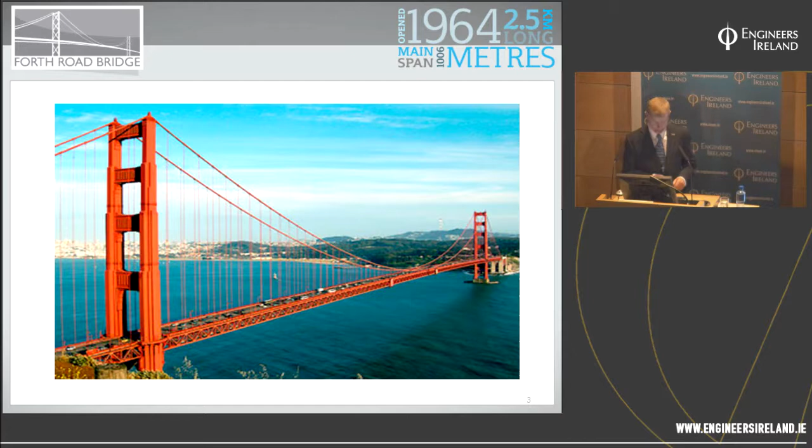This actually should be the most famous bridge in the world, but it isn't. It's the Akashi Kaikyo Bridge in Japan, with a main span of 1,991 metres - almost 2 kilometres between those two big towers. If you're ever lucky enough to get to Japan, it's really worth a visit. It's a monster - this slide doesn't do it justice. It's twice the length of Forth Road Bridge between the towers, and it's quite a sight.

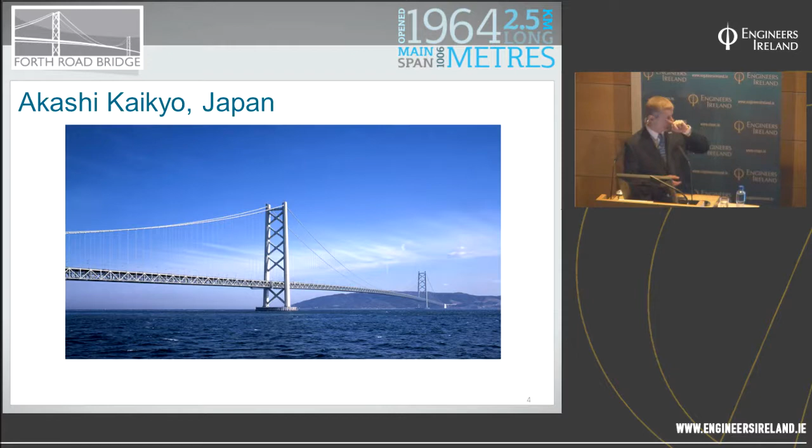Those are suspension bridges. Of course, cable-stayed bridges are being built as well throughout the world, and this is another development. There seems to be a trend that cable-stayed bridge spans are increasing too, and I'll show you a graph of that in a bit, but this is Stonecutters in Hong Kong, 1018 metres. We're now over 1,000 metres for cable-stayed spans, and 15 years ago that wouldn't have seemed possible.

There are lots of these being built in China. This is one across the Yangtze at Wuhan, about a 500 metre span. There are dozens of these built and opened in the past 10 to 15 years in China. The big question is, how well have they been built for maintenance? And the answer, I think honestly, is probably not very well. There may be an issue, like any developing economy, where the race is to get the infrastructure in place to get the capital flowing and develop the economy. Sometimes the thought of maintaining them afterwards is a secondary or even tertiary one, and a lot of issues, I think, are going to crop up over the next 10 to 15 years with these bridges.

Still building suspension bridges in China as well. This is one which has just recently been completed and will open in April of this year at Wuhan. This is quite a beast - it's a 3-tower twin-span suspension bridge, which is pretty unusual. The two towers at the ends are concrete, and the middle one is steel to allow it to flex when there's asymmetric loading in the spans.

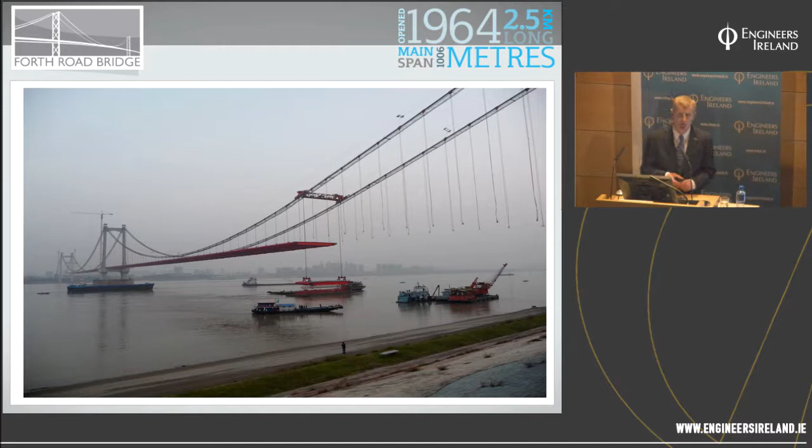There's a lot of discussion over cable-stayed bridges versus suspension bridges - what's the best form? Suspension bridges cost about £5,000 a square metre to build, while cable-stayed bridges will be about £3,000 a square metre. So there is a difference, and it's mainly on construction cost and construction time that this cost is realised or shown.

Here's a graph of developments and spans over the years. Here's Brooklyn back in 1880, and you can see what's happened. These are suspension bridges - this massive jump here with George Washington and Golden Gate, and then it flattens off again, and there's Akashi. The poor Danes built Storebelt in the same year, a 1,600 odd metre span, and got gazumped by this monster, so they didn't hold the title for very long at all. What will happen after that? Who knows - there's a proposed 3-kilometre span to Messina. It's been on the cards for a while, but hasn't developed.

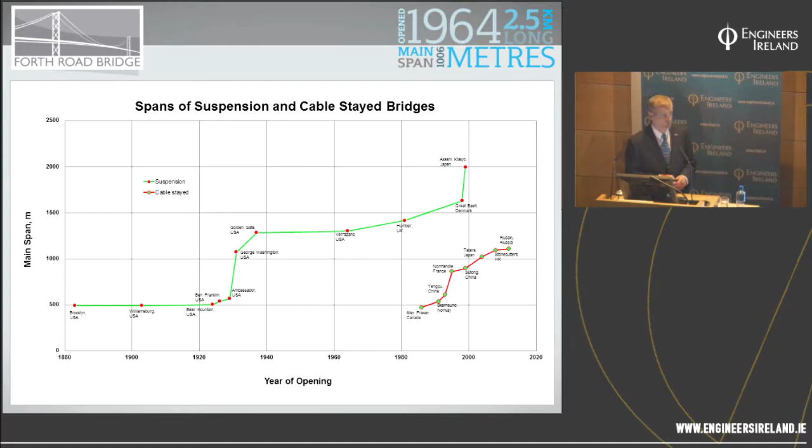If you look at the shape of this graph, it's shifted to the right because of time, and also down because of spans. This is cable-stayed bridges, and they're very similar in shape. This jump here to Pont de Normandie was huge - this was Michel Virlogeux's great leap in the dark, because they were pottering around about 500 metres, and he built one at 856 metres. Again it's jumped up, and we've had the Russky Bridge just opened in 2012-13, with a 1,104 metre span. So it's quite a jump there.

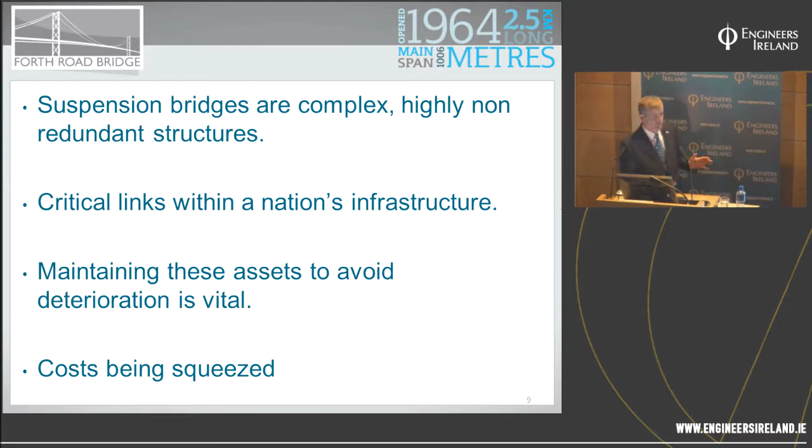Concentrating on suspension bridges, they are very complex, highly non-redundant structures, meaning that if one of the major elements fails, you've lost the bridge - there's not many places for load to go. They're usually critical links within a nation's infrastructure, so maintaining them is vital, especially as we're all facing costs being squeezed, so you've got to justify the maintenance costs in the future.

This is on a fairly lightly loaded day with the wind not doing very much. The bridge will actually deflect 4 meters when it has its full traffic loading on it, and it will move 7 meters laterally at its full design wind speed. We've got GNSS sensors on the bridge, and when we got hit by an 85 mile an hour gust the other month, the bridge moved 3.5 meters to the side.

So these are very flexible structures, and they're also highly non-redundant structures. They have to be looked after. A lot of money needs to be spent on them, because you don't want to end up with something like this.

This is Kartanegara in Indonesia. It failed a few years ago. Whether it was design, construction, inspection, or maintenance that caused the failure, we don't know, and I'm not sure we'll ever know. But lives are lost, and we can't afford for that to happen.

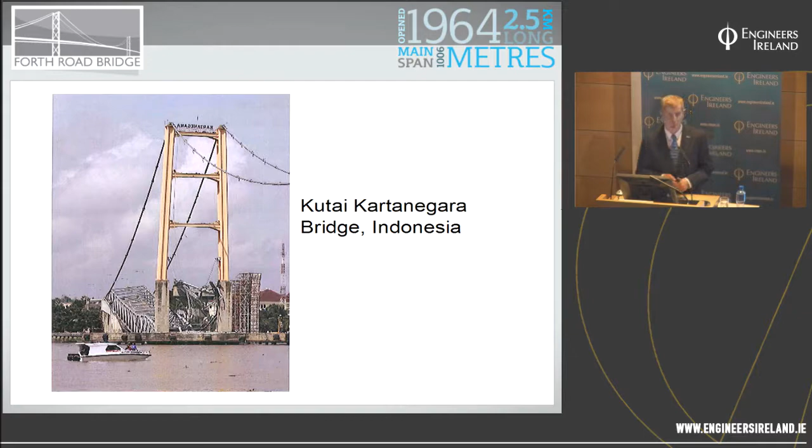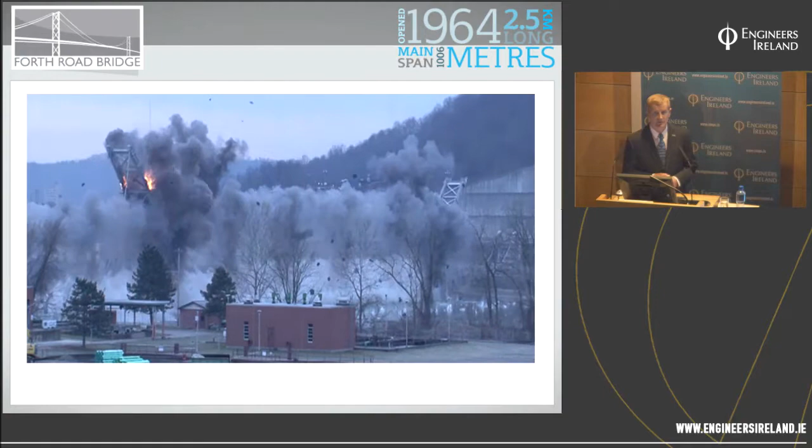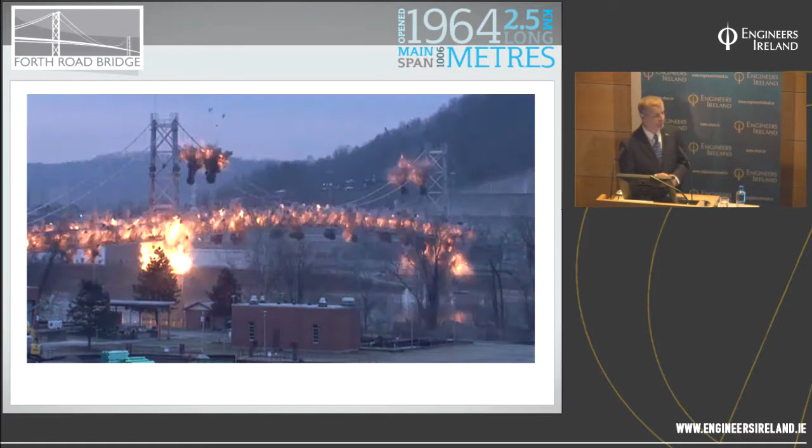But it's not only in so-called third world countries that we get problems with bridge maintenance. This is a bridge in the United States across the Ohio River, Fort Steuben, and it deteriorated to the point that it had to be demolished and a new one built. I think that's a terrible state for you to let your nation's bridge stock get into, that you have to do that.

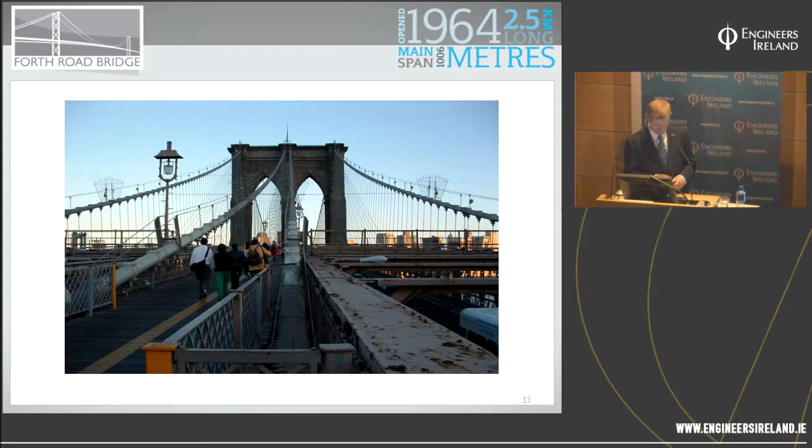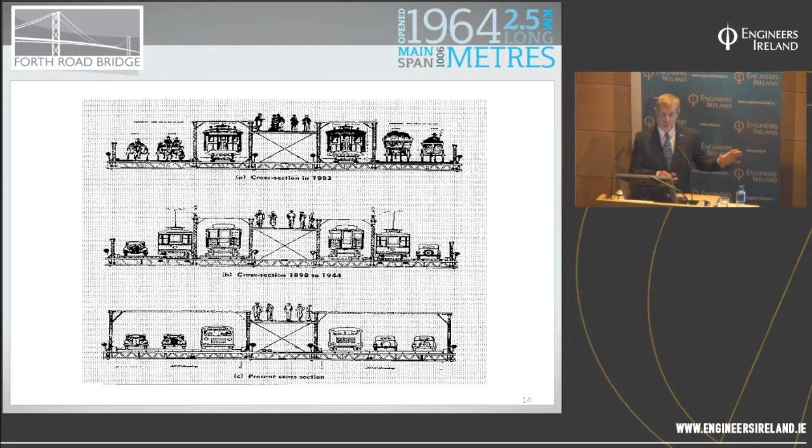Functionality changes over the years in these bridges as well, and we must be aware of that. The top section shows Brooklyn, opened in 1883, and Roebling would probably never have thought it would be taking motorised vehicles nowadays. By 1944, with some structural alteration, it's now carrying vehicular traffic only. The pedestrians are in the same place, but it's restricted to only light vehicles and cars.

Now the diversion route is huge - it's around by Kincardine, 22 miles there and 22 miles back. If we are unlucky enough to have an incident on the bridge, it's 2 lanes north, 2 lanes south, as we did when we had a diesel spill and a lane out for 6.5 to 7 hours. The queue length was 4 hours coming out of Edinburgh. There was no point in people going around by Kincardine, because it would have taken the same time.

That sort of thing becomes politically a problem, and we get a lot of pressure when that happens. So we are very restricted in what we can do - we can't close a lane or a carriageway during the day. Most of the work is carried out overnight, or if we have to resurface, it's specified and notified well in advance for carriageway closures on weekends when traffic's down about 10%, but we still get 2.5 to 3 hour queues when that happens.

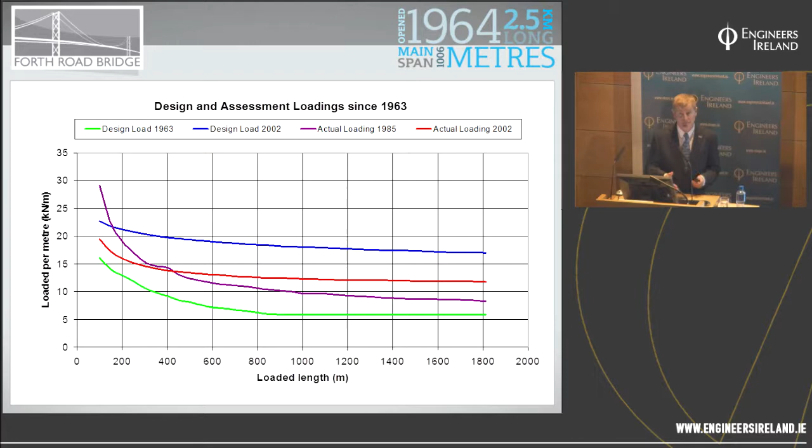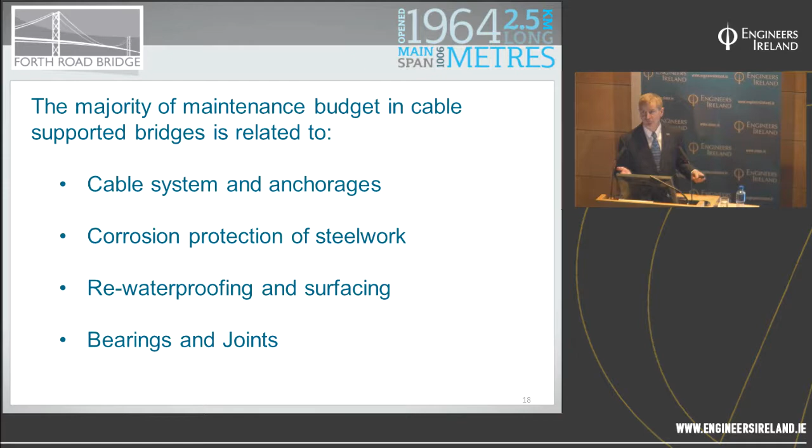With maintenance in these suspension bridges and any cable-supported bridge, the big ticket item is the cable system and anchorages, if you've got them. We've also got the three usual suspects that everyone has, no matter what the bridge is: corrosion of steelwork, waterproofing and surfacing, and our old favourites of bearings and joints - the ones we know and love.

For example, we had to build pier defences around the bottom of the piers because shipping has changed, and the overhang of the bows of modern-day vessels would now impact the steel tower legs, whereas before, when they designed it, that wasn't thought about because they wouldn't have needed to.

So a lot of money has been spent on the bridge over the years, and I'm going to concentrate on the cable issues we've had. But interestingly, the biggest amount of money we've spent has been on replacing the viaduct bearings.

The approach viaducts are very common - two simple box girders with a concrete deck on top. There's about 750 metres of viaducts in total: roughly 260-270 metres in the north and 450 in the south. And that's been the biggest ticket job in cost terms.

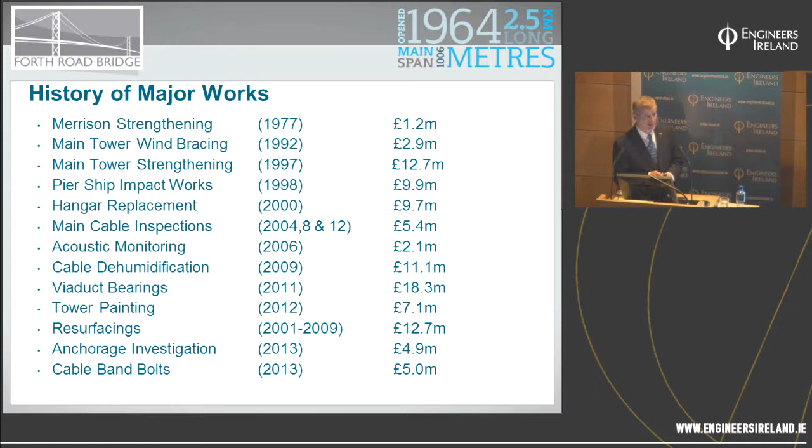We jacked the box girders up and replaced all the bearings, but we had issues with chlorides in the piers that were supporting it. But I will concentrate on the cable works we've carried out, because they've caused quite a lot of interest over the years.

But that's just an idea of the money spent - we've spent £259 million on capital projects since the bridge was opened. Now, the cost of building the bridge - these costs are as of the time of spend - was £11.5 million.

And that's not too unusual. The George Washington Bridge is just about to undergo a $1 billion refit, in addition to the money already spent on it to date. You've got to spend money on these assets because things change - risks change, loading changes - and things deteriorate as well, because they do move about quite a bit.

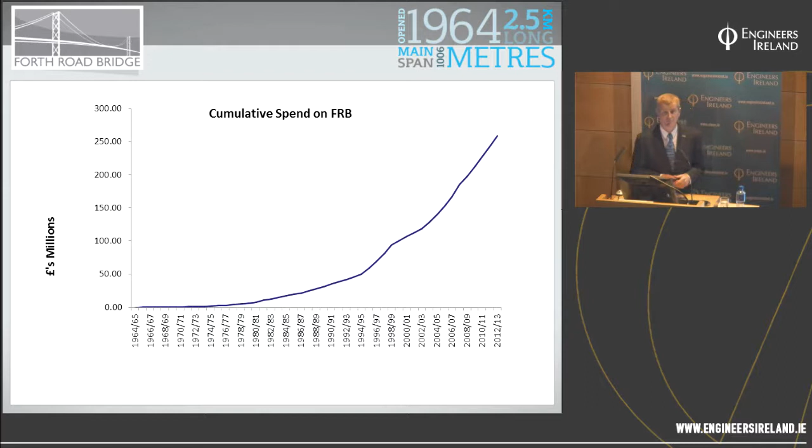I'll look at the cable in some detail. Cables and suspension bridges are fairly unique in that they're made up of individual wires, and this is how the Forth Road Bridge cable was formed, and that was how Roebling's formed Brooklyn, and Golden Gate was formed, and George Washington, and all the bridges up to that point.

These wires are high tensile galvanized wires that come in reels onto the site. I've seen other photographs of how they coax them into place, usually with pinch bars. If you're using a pinch bar on galvanized wire, you will damage the galvanizing. So, as in all cases, what happens on site sometimes has the greatest effect on how your component will act throughout its life.

There's been a new development: these are called strands, and there are 37 of them, and the cable is put into strands as it's spun. The Japanese have come up with a new development where they now form the strands in the factory, which takes away splicing and means you're constructing them in a factory setting. It means you have to transport them in huge drums, but it has assisted both in speed and in preventing damage to the wire when it's put in place.

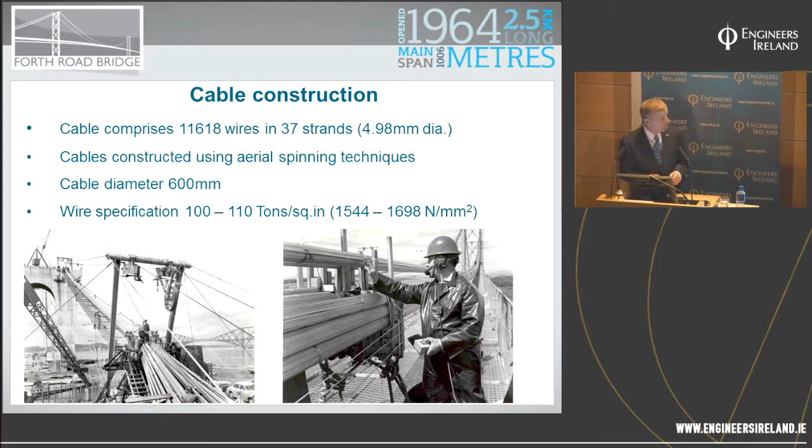You then compact them, traditionally with a compacting machine. As you can see, the guys are not posing at all in that photograph, which was taken sometime around 1962-63. After that, a galvanized wire is wrapped around the outside under a bit of tension by a wrapping machine, which you can see on the right hand side.

Before the wire is wrapped around, it's been traditional to put red lead paste on it - this was a Roebling's idea - and then wrap the galvanized wrapping wire around it. We tend to use zinc paste now because red lead is, of course, banned from use. That method of construction has been used since Brooklyn.

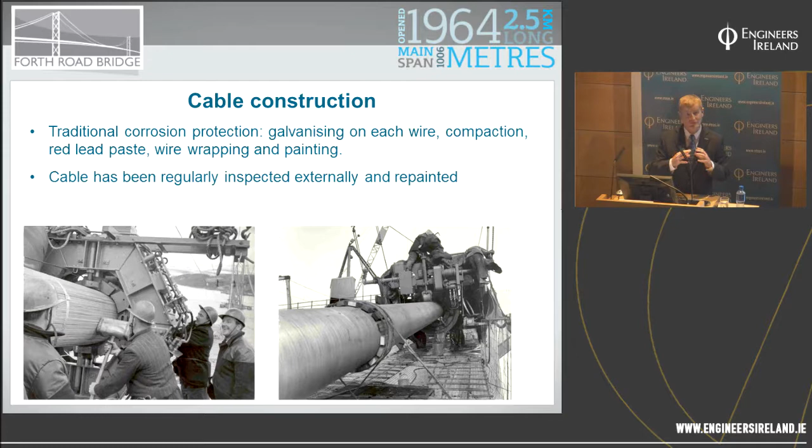You can compact the cable as much as you like, but you'll never take all the voids out of it, because you've got circular wires touching each other. On average, compaction will take you down to about 20% voids. So even though it looks like a very dense cable, 20% of it is still void, is air. That's what it looks like in section: galvanized wire, wrapping wire, red lead paste or zinc paste, wrapping wire, and coating.

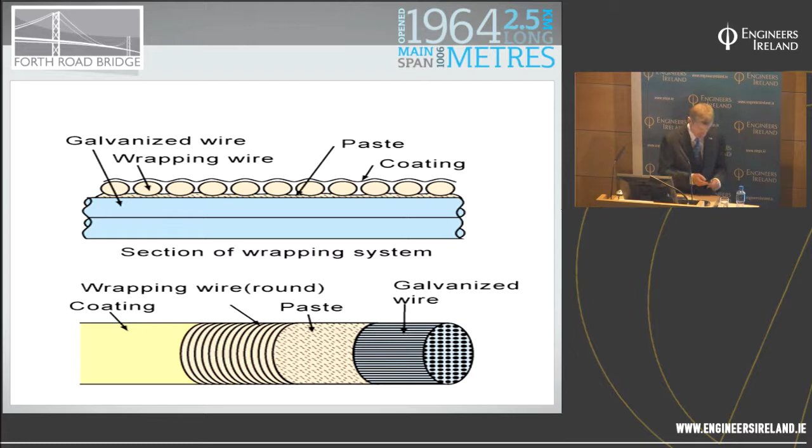You take the wrapping wire off and drive wedges into it to open it, and they were finding really serious problems in some of the bridges. Because of that, the National Academy set up a working group to produce guidelines to inspect these cables, because nothing was available at the time, and to evaluate their strength. Once you've inspected them, what do you do once you find conditions like that? How do you evaluate the strength or strength loss?

We decided in 2004, having gone across to see these things, to have a look inside the cable at Forth. Even though we didn't have water running out of our cable, which they did in some of the bridges - it was dry, looked great on the outside, had been well maintained and well painted - we asked ourselves the question: this is the most important element of the whole bridge. When we carry out a principal inspection, how can we say that we've had a close visual inspection of the wires within the cable? And the answer is we couldn't.

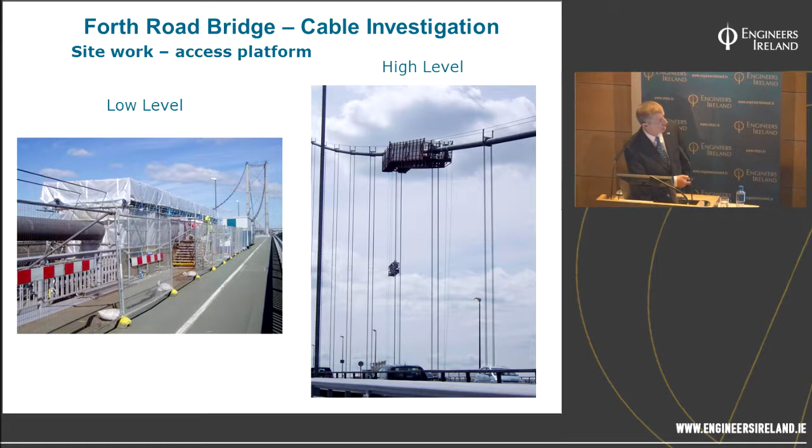When you do that, the Americans were doing it all the way around. We were a bit more cautious and decided we'd do one sector at a time.

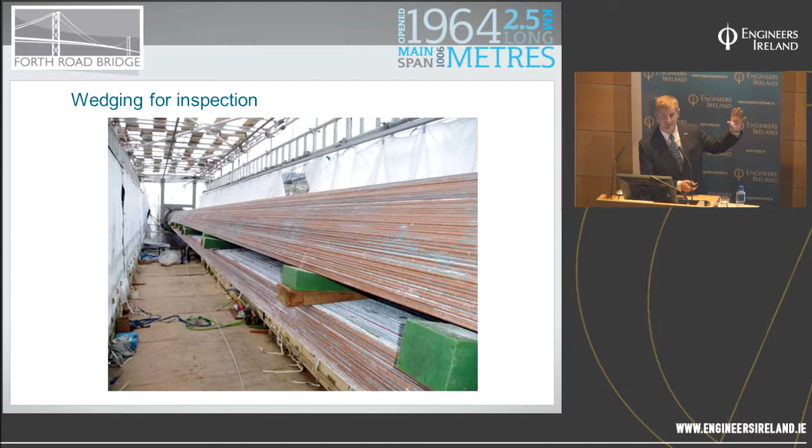You can see that red there is actually the red lead, and unfortunately the first sign we looked at was when we touched the red lead, it just fell off. It was so friable. But we had expected that we'd open up this panel at the bottom here, the easy one, see how good it was inside, think that's great, we've seen it, wrap it up, move along.

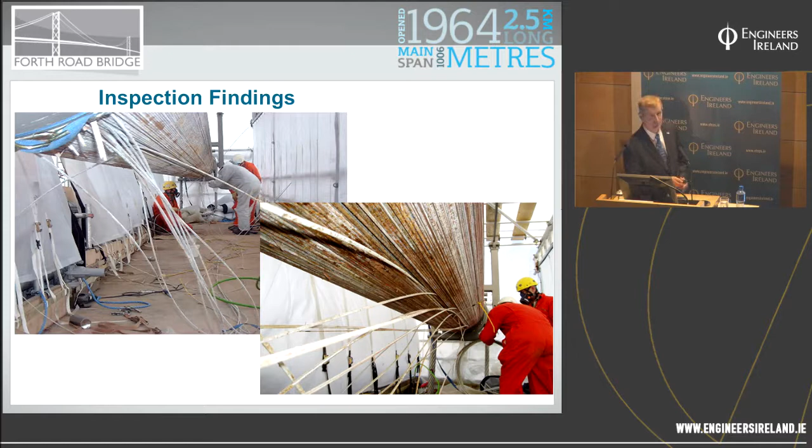Unfortunately, we found this. Not as bad as the American experience, but wires falling out, quite damp underneath the cable, quite a bit of corrosion, as you can see. That's a sort of typical damp, pitting corrosion that we were finding within the cable.

This set off all sorts of alarm bells about crossing the Forth, and as a direct result of this the government decided they'd have to build a new bridge across the Forth, because they asked for an unconditional guarantee and I said I couldn't give that about strength loss. So we decided they'd need to build a new crossing because it's such a vital part of Scotland's road network. We need it, frankly, because of the traffic volumes, but you're not allowed to say that, so better not.

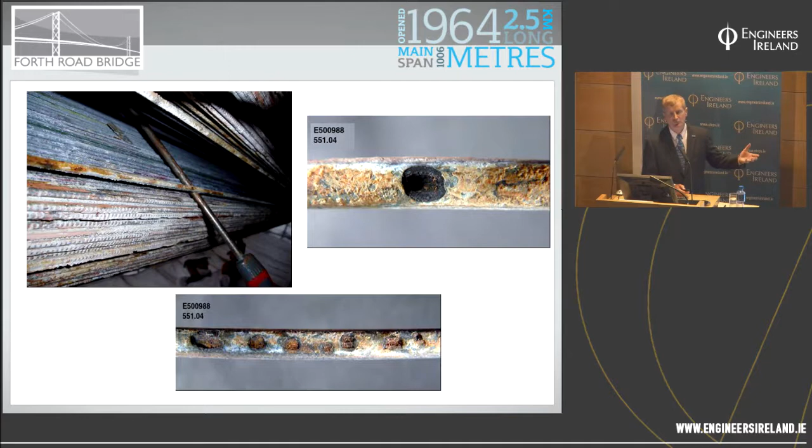We've got other issues with maintenance as well, and the joints in the carriageway, which we're not able to do because we can't close the carriageway for any period of time to do it. So you need a new bridge to be able to free up the existing crossing to maintain it.

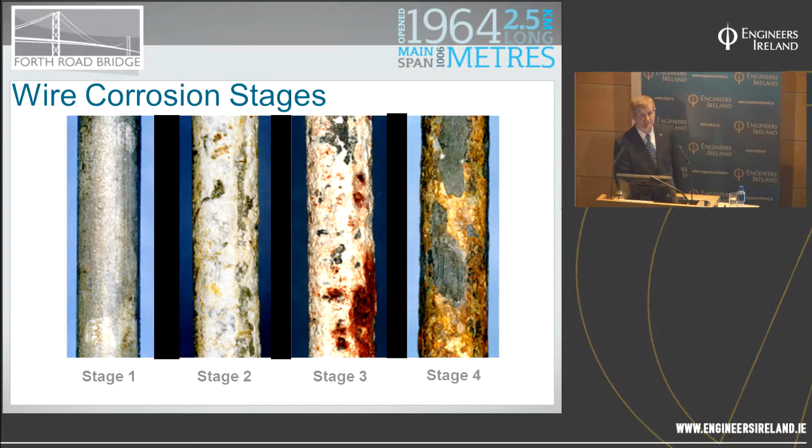Looks really bad. The problem with the NCHRP, the National Academy's guidelines, is that it's done on a visual basis. When you open up your cable, you'll get a wire that looks like that for a metre, then looks like that for the rest, and sometimes it looks like that on one side of the wire and different on the other side. That's a great difficulty with the methodology, unfortunately.

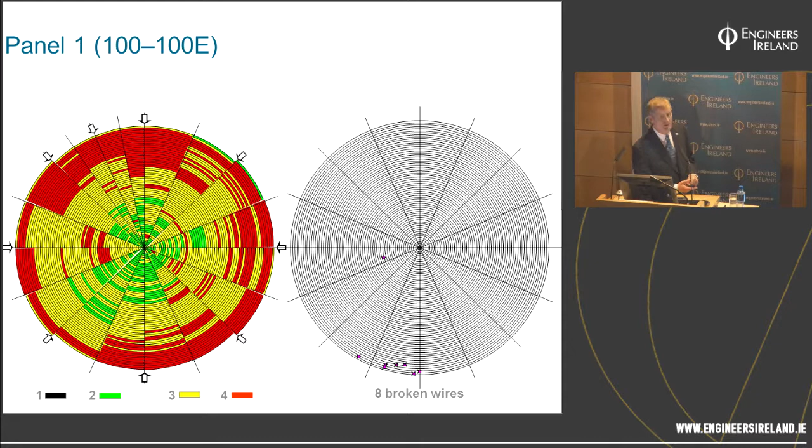But the funny thing is that if you look at the right-hand side, there are very few broken wires despite lots of corrosion, very few wires are broken because of that.

Now, it doesn't mean you lose the wire, because due to friction in the cable it actually redevelops its strength a couple of panels along. But the problem is you can't rely on that forever if you've got a lot more broken wires than just the one, and that's the problem.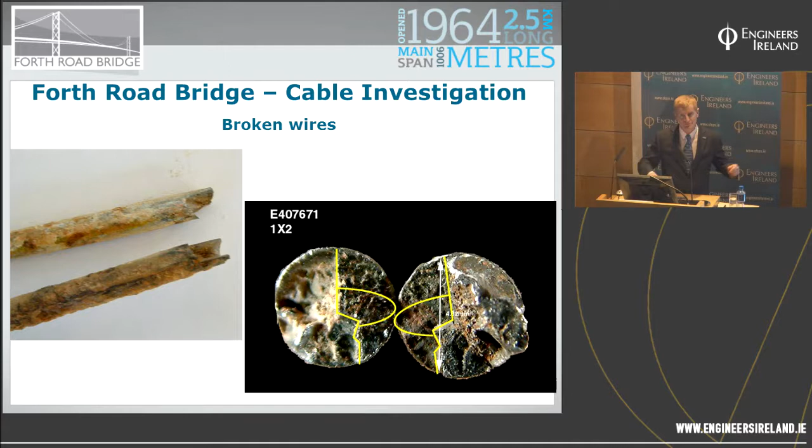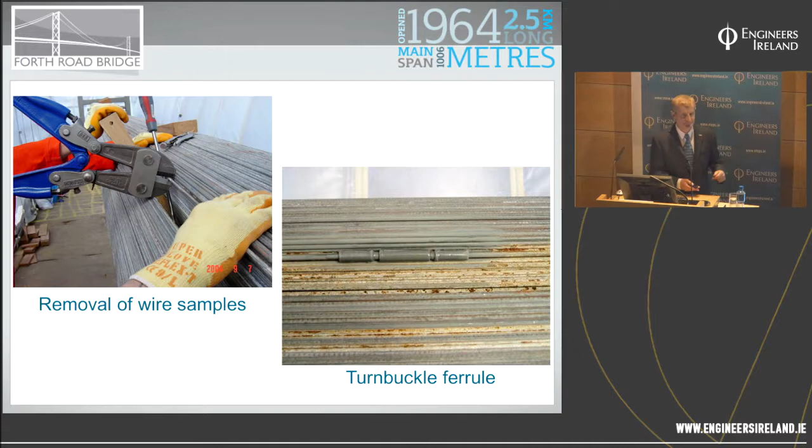We took samples. The only thing about taking samples is you've got to splice in, and you can only get them as far as you can cut it with these cutters, then splice it in, which again leaves gaps. When you wrap the cable you can see some of the splices, which gives you a water issue, a path for water.

One of the big challenges for us was, having seen the condition, how do you determine how much strength you've lost based on a condition and testing wires? But it's all about cracking. Corrosion isn't the major issue. The issue is cracking. Cracking leads to breakages, which leads to strength loss.

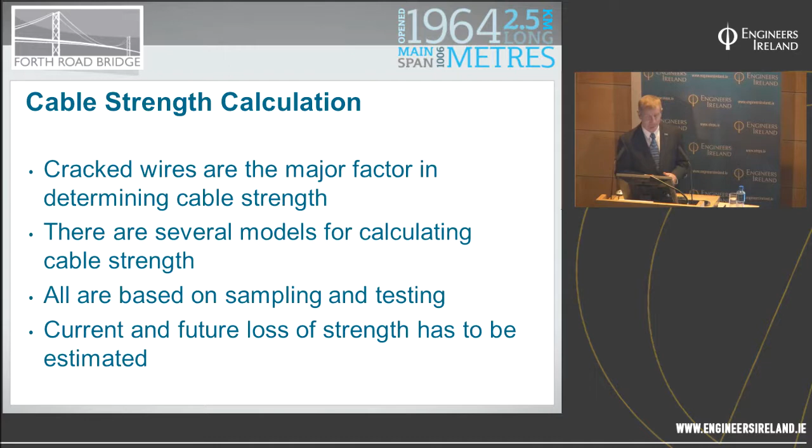There are quite a number of models for calculating cable strength. All are based on sampling and testing. And what we want to know is, what's the current strength and what's the future strength, which isn't an easy thing to do. The sampling is so small in these.

That first investigation of ours cost something like £5 million. And I think we did about 4% of the bridge. We opened up 4% of the panels, which isn't 4% of the length of wire. The length of wire that we looked at was less than 1%. So we're having to make quite significant decisions based on a very small sample, which we're hoping represents the population as a whole in the cable.

And these are the sort of errors that you get. So if you can open up 16% of your panels, it's about 11% error. Now, we only opened up 4. I don't know anyone that's opened up 16%, because it's just not affordable.

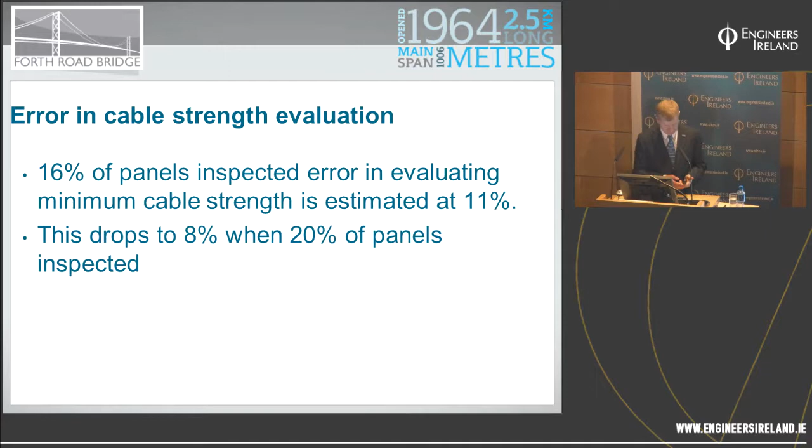Wire strengths, fortunately and unfortunately, depending which way you want to look at it, have gone up in recent years. And one of the problems is, you can see in this graph from Brooklyn, the stronger the wire is, the more brittle it is. There's always a trade-off in life, and the stronger you make it, the more brittle it becomes. It has to be stronger for the bigger spans to cut down weight, but it becomes more brittle, and in maintenance terms that causes a problem.

Because we know that hydrogen embrittlement starts to become a problem at about 150 KSI, or about 1034 newtons per millimetre squared. Now that means that the higher you go, maybe John Roebling knew something when he had his wire down about that strength.

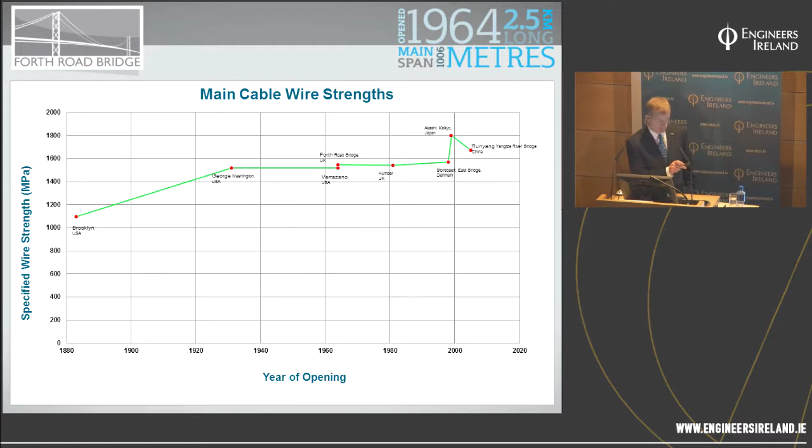The higher you go, the more prone it is to hydrogen embrittlement, the more prone it is to cracking, the more likely it is that you have to make sure that you don't get water in that cable. And we've not been very good at that, unfortunately.

This is quite an interesting graph. These are two graphs showing the wire that was tested out of Forth Road Bridge cable. The one on the right acts exactly as a new wire would. You can see this is stress versus strain. You'll probably remember this sort of stuff. Sorry, it's in KSI here, but it was an American lab that did it. But yield here, fails here, pretty flat here, but fails at that point here and yields at that point. And that's a pretty good wire.

This is a worse wire, also sampled. As you can see, there's a lot of energy required. The strain energy required to break that wire is the area under the curve here. And it's 4%, it almost reaches elongation of 4%, pretty good. So there's obviously no cracks in this wire.

This one's obviously had a crack in it, and it fails at less than 1% strain at just over 200 KSI. Very little energy required to break that. That, unfortunately, was a stage 2 or 3 wire, and that's a stage 4 wire. So the visual on this is that that's the worst wire, and that isn't.

So that is a problem for us and an issue going forward, and we need some more work in this to try and rationalise it, because the problem isn't corrosion, the problem is up here. It's atomic hydrogen getting into the body of the steel. That's what causes cracking, and that's here.

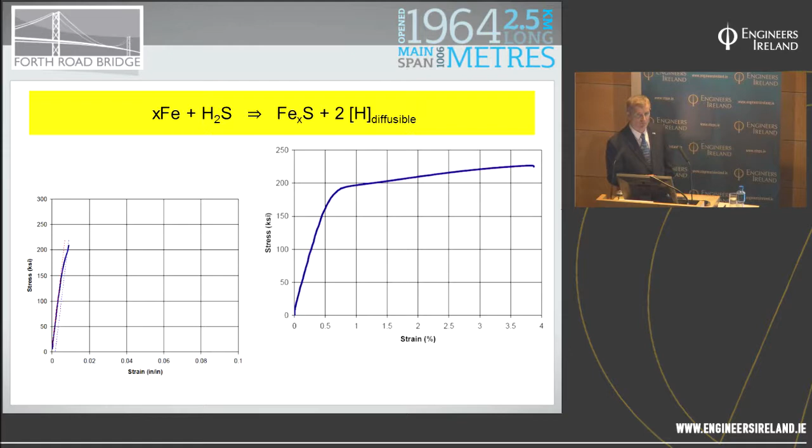Corrosion is an indicator you've got a problem, but it isn't the reason that the cables are losing strength. Cracking's the reason, and wire breaks.

We looked at the start, Forth Road Bridge at a factor of safety of 2.64 or something in 1964. When we examined the cable, we estimated the strength loss was 8% in 2004. Great curve fitting stuff this, you get 2 points.

40 years apart, fit a curve. We decided that we'd want to keep it above 2. Now this is against ultimate failure, this is not against yield—if you think about yield, it's probably about 1.75 equivalency. 2 sounded good, why 2? Why do you want to keep it above 2? Well, it's a nice round number.

That's it, basically. I had a word with a lot of the owners in the States, and whilst no one would pin their colours to the mast except for Bill Moreau up at New York State bridges—he said he wouldn't run traffic in a suspension bridge with a factor of safety below 2. Sounded good enough to me, and so we plumped for 2.

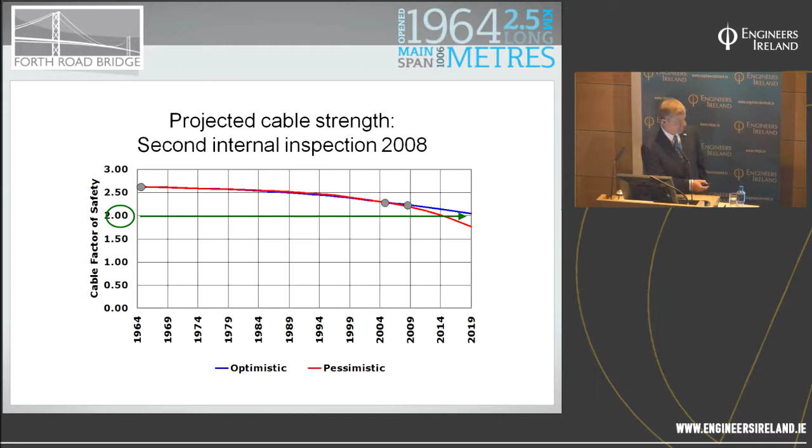Now our thoughts were, how do we keep this line above 2? How do we flatten out that curve? This was another inspection in 2008, and this is the optimistic and pessimistic lines. So how do we keep that above—that was the challenge.

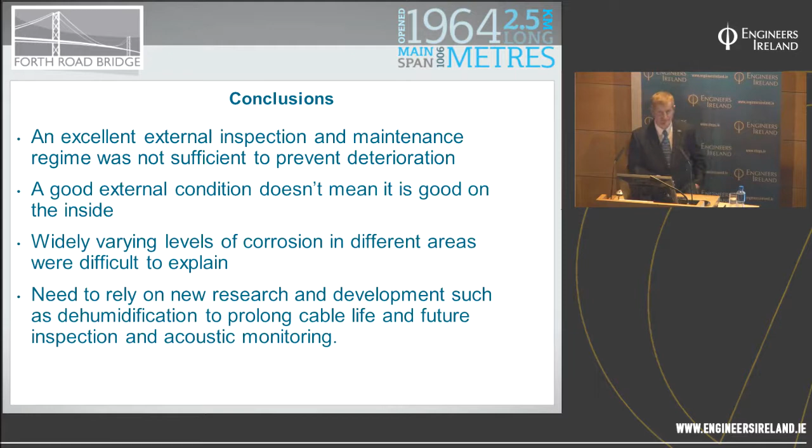And the conclusions we reached on all of this was that we had different levels of corrosion. Looked good on the outside, doesn't mean it's good on the inside, and even though you think you're doing well with your maintenance, it doesn't mean to say that you haven't got corrosion on the inside.

One of the things you have to do, unfortunately, after each one of these, and one of the reasons it's so expensive, is to recompact it and rewrap it. This was the last—in 2004, we got the last batch of red lead paste from the New Amsterdam works in New Jersey. I think they're still manufacturing it somewhere in China, but I'm not quite sure where.

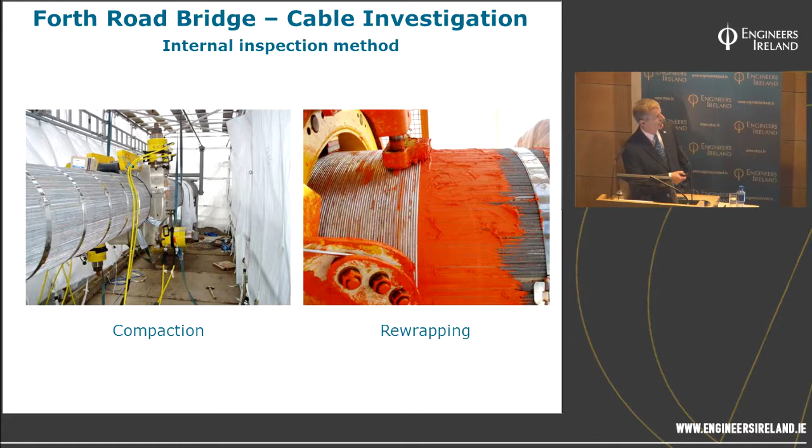You can see the wrapping well. We had to redesign and build this because the original compactor that you saw in the previous photographs went to Severn, and then it went to Bosphorus, and then it disappeared. So we had to build a new one.

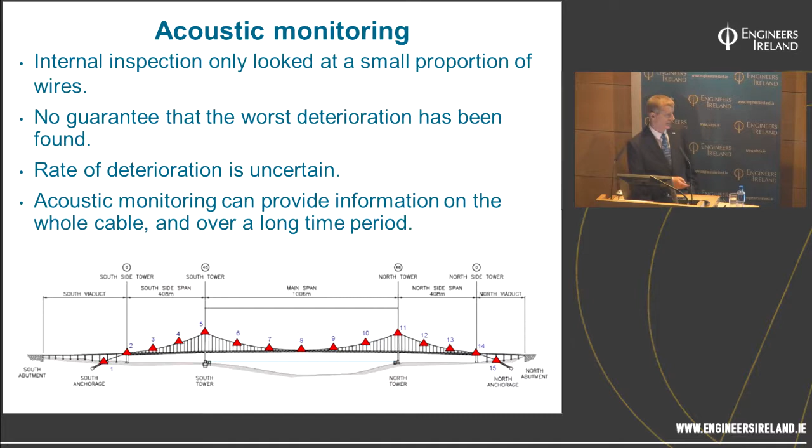We decided that we would fit acoustic monitoring onto the bridge to try and listen for wire breaks. There's still a bit of validation needs to be done in the technology. It's quite new. It can provide an early warning system, but it doesn't certainly mean that you don't have to open up and inspect in the future. That's what acoustic monitoring looks like.

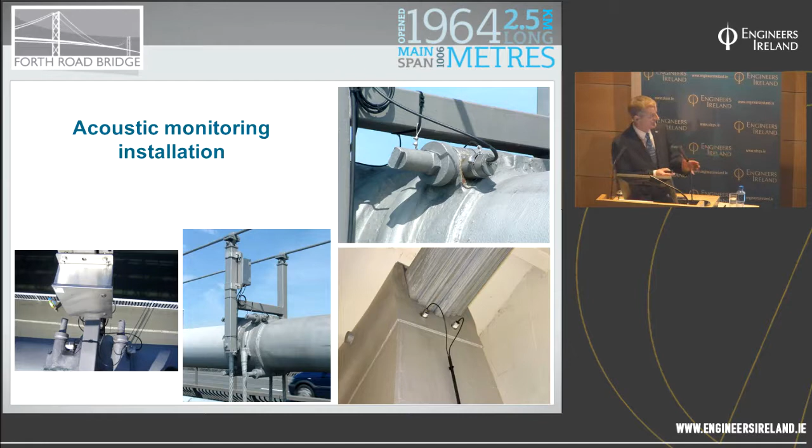Unfortunately, this was a prototype system when we put it in in 2006, and the fidelity is up so high you can actually hear seagulls dropping onto the cable. So there's some poor guy in Canada trying to listen for wire breaks in the Forth Road Bridge, and he's hearing seagulls and people coughing as they pass him. So he's getting this massive data and he's trying to identify wire breaks, but they do have a peculiar signal.

So what do we do to stop it corroding? We looked at oiling—this is Ben Franklin in Philadelphia. It just doesn't look—you open up the cable and pour oil in it and wrap it up and hope for the best. Doesn't look very good. And I don't understand how it works, because the oil dries out and you have to do it again. It hasn't really caught on.

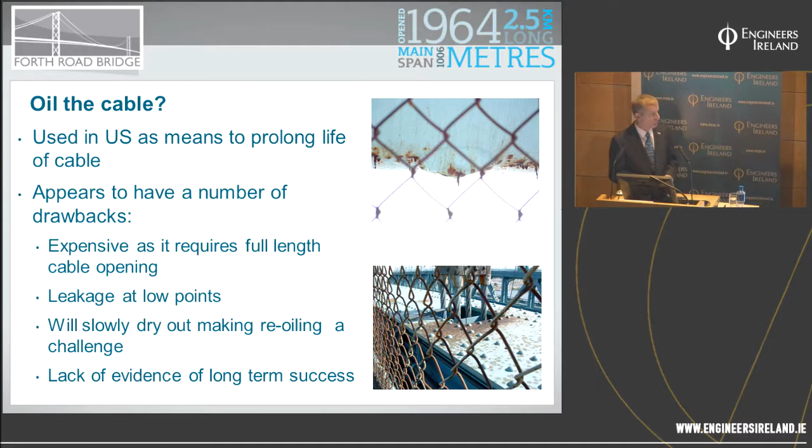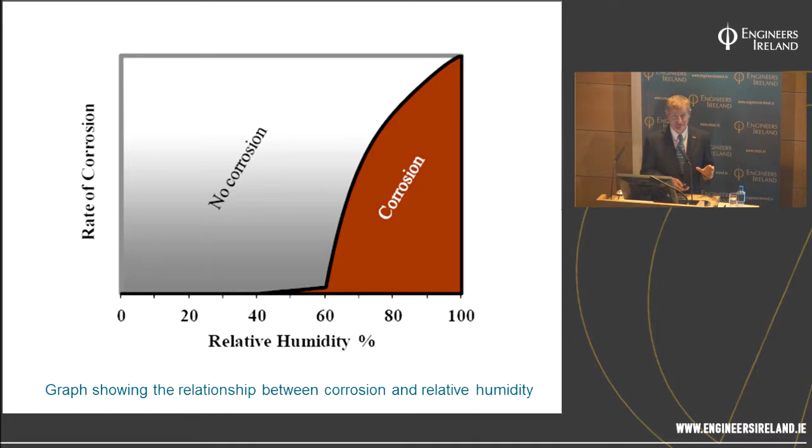So we looked at dehumidification. If you put a bit of galvanized steel in a chamber with relative humidity below 40%, it will not corrode. But one important thing is that's a bit of steel without any stress in it and without any damage done to it. So we fitted a dehumidification system to the bridge. We put an elastomeric wrap round to try and keep the air in. I'm not a great fan of hiding things by putting wraps around them, but in this case we really had to.

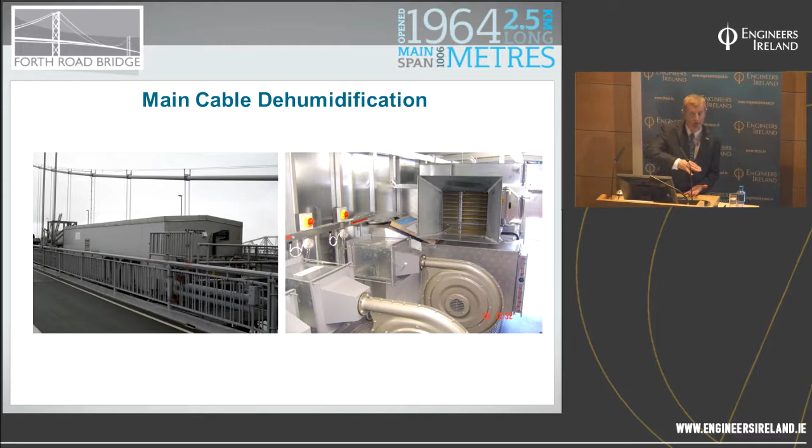You can see the system. Green is air in, red is air out, and these are the inlets and outlets. Dehumidification chamber, fans and a dehumidifier, pumping it in at about 3,000 pascals. Very low—that's only about 300 mm of water. Very low pressure, diffuses up the cable. It's supposed to hit a relative humidity gradient.

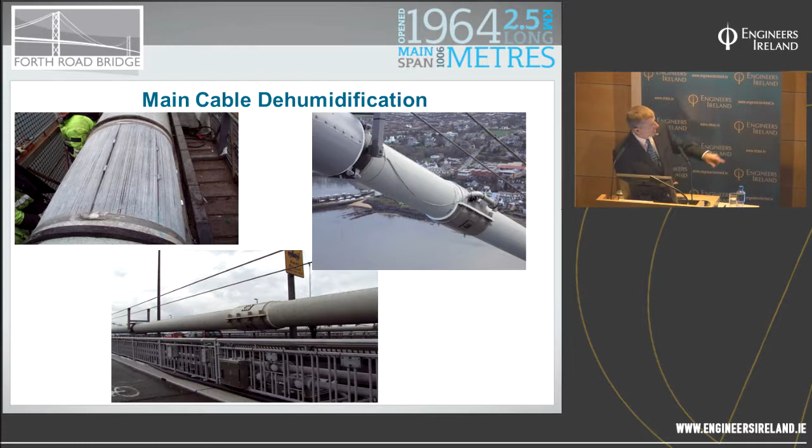We put inlets there. The Japanese started this all back in the 1990s by putting it on a couple of bridges, and we've just copied them basically. We opened up the cable by using small galvanized wedges. And that's an inlet and an outlet chamber there. There's one at the top. Again, getting up there is a problem.

I think that scheme cost about £10 million to do. And slowly, we're measuring at these outlets pressure, temperature, relative humidity, and flow—when they're working, that is, of course, because the first rule of sensors and anything you put on a main cable is you spend half the time wondering if the thing's working or not.

And we think we're slowly—we had another inspection in 2013 and we think it's beginning to level off. I drew this curve myself, and I think you could say it's the optimistic one.

Or maybe I just was having an optimistic day.

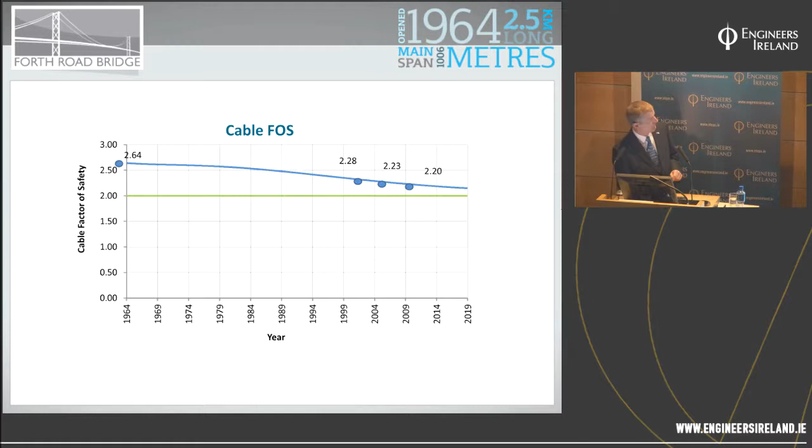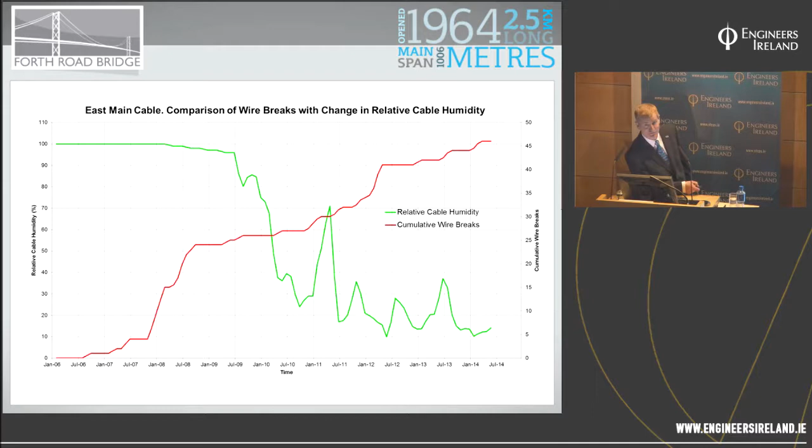Whether it's a coincidence that wire breaks started flattening off when we began dehumidification, I don't think it is. We need to get to about this level before we can finally say it's working. It'll be about 10 years, I would think.

I'll quickly go on to the anchorages, because they've been an integral part of the issues with the main cable - it's all right having a main cable, but you've got to have somewhere to anchor it. These are the North Anchorage at Forth Road Bridge. Each of these cables is taking about 12,500 tonnes dead load, with a total load of about 13,500 tonnes on any one day, anchored into rock on the north and south sides.

Cross sections like this - this is the North Viaduct above the anchorage, shown in this simplified sketch. The tunnel goes down about 76 metres at an angle of 30 degrees. It was a fantastic idea, and the engineers at the time described it in the paper as innovative, which is enough to make anyone's blood run cold - it's post-tensioning in a tunnel.

Now we all know what's happened to post-tensioning in bridge decks. So to put it in a tunnel in the late 1950s - this was finished in 1961, because you have to build your anchorages before anything else - was really, really innovative. Post-tensioning in a highly saline environment too, because there's mean high water springs here, so it's underwater most of the time as the tide goes up and down.

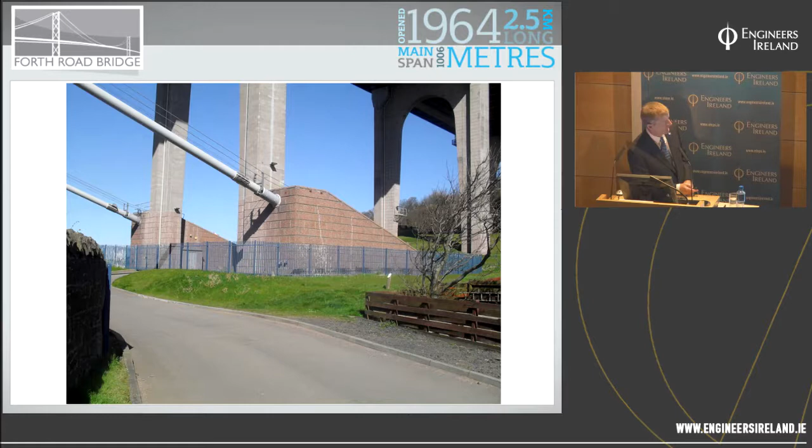Hydrogen coming off in the chamber here - if I go back one, there's the chamber. These are the anchorage chambers, which have quite a lot of security around them, obviously, because they're fairly critical infrastructure. That's the chamber as the cable goes in.

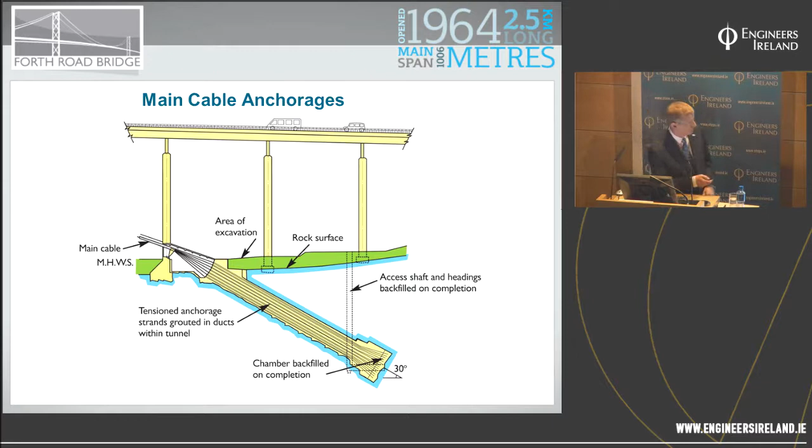That's the chamber you can see there, and the cable splays out over a saddle and is looped round strand shoes here - I'll show you these in a second. That's a post-tensioning duct. 32mm diameter strand, a Warrington lay with filler wires - 6 filler wires, 19 strands, galvanised.

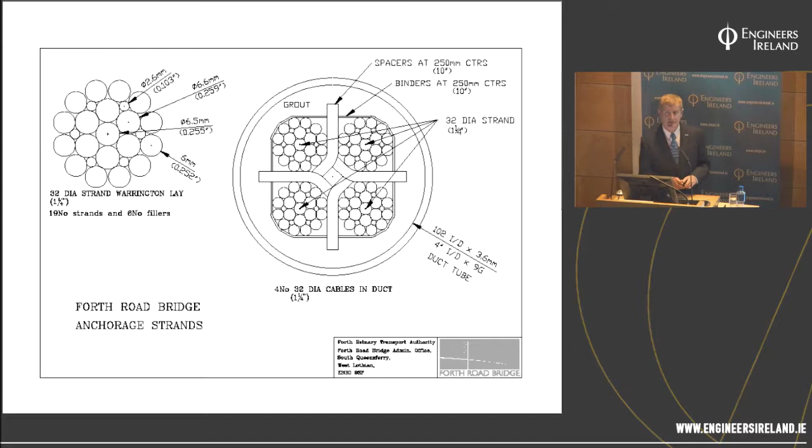And that's the sort of thing that made us worried. You get these spacers, and does the grout actually go in there, with banding round and steel ducts on the outside? They were grouted from the bottom, which must have been some feat to get grout all the way up. They did notice during construction that they were getting hydrogen coming out into the chamber, and they thought the hydrogen was caused by zinc depletion from corrosion. That's how the chamber was built, tunneled in there.

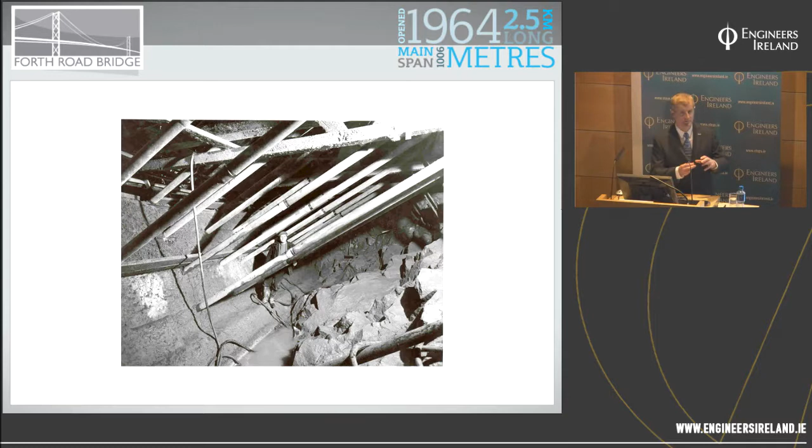That's one of the tunnel lifts. There isn't really an issue with the rock tunnel itself - the factor of safety against that big rock plug pulling out is pretty huge, over 3. That's not going anywhere. But unfortunately, as we know, concrete isn't very good in tension, and without the post-tensioning, the concrete would pull apart. So post-tensioning is a vital part of the system, running through these ducts cast into the concrete.

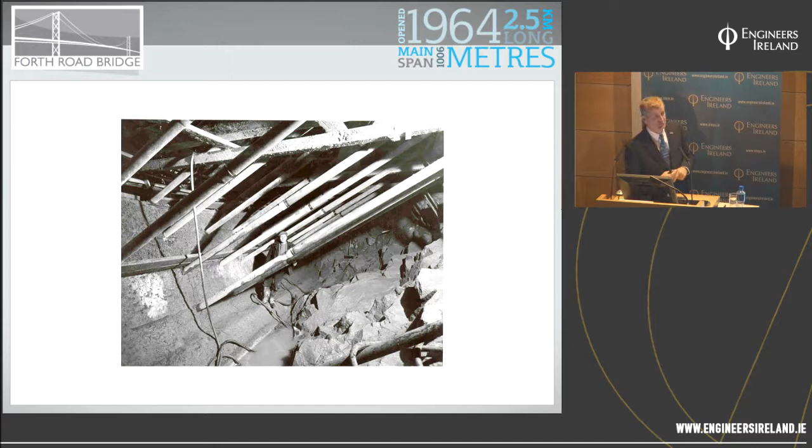And that's a shot of the inside of the Anchorage chamber. That's the top of the steel ducts. They're in sockets here, zinc, hot metal sockets, and they were slid down in the sleeves, down to the bottom, and then they pulled them, jacked them at the bottom, and wedged them. There's 150 tons in each of these socketed tension strands, and there's a big strand shoe at the bottom here, and there's a strand plate which fixes onto the face of the tunnel, which is here.

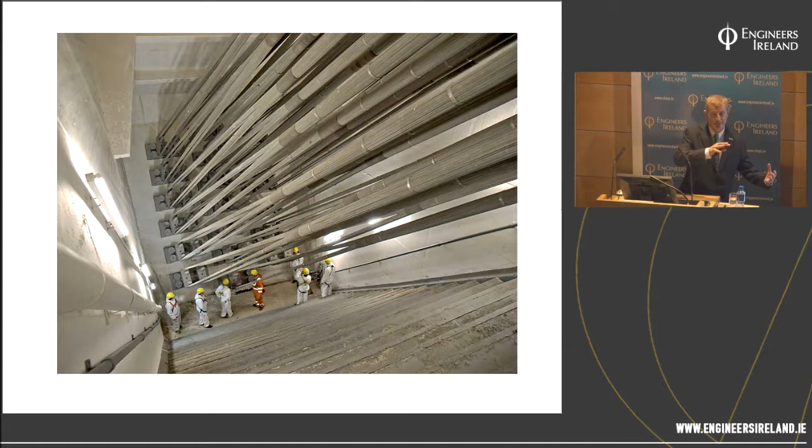So there's 13,500 tons or so trying to pull that big plug out the ground. The plug won't pull out, and there's all these post-tension wires stopping the concrete pulling apart. And we don't know the condition of them. There's no way of finding out. We tried ultrasonics, radar, everything. No one could guarantee that they could tell us the condition of these.

So we've no sign of movement. We're fairly happy with it, but we accepted that's what we had. But unfortunately, in about 2005-06, we received copies of the resident engineer's reports, which we hadn't had before, from a private source, which painted a somewhat darker picture than the ICE proceedings had.

There were great concerns over corrosion in these strands, and they had several reports from corrosion bodies at the time to come and examine them and try and find out what they could do. And one of the things that they came up with was to install pumps round about the chambers and have them running continually to keep the water level below the bottom of the anchorages. And that's how the story ended on these reports.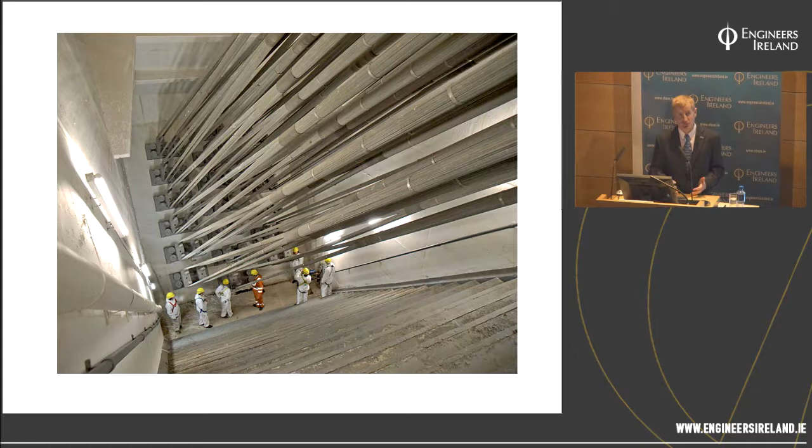Now, it was quite clear to us that we did try and have a look, but there's never any sign of a pump's ever been installed, either on the north or south side. So we don't know the story, we don't know what happened and why the pumps weren't installed. All we knew was that they had never been there.

So that gave us cause for concern, and we decided that we would need to take action to try and establish the structural integrity of these anchorages, because if you lose an anchorage, you not only lose the bridge, there's a possibility you lose the river as well, and that couldn't be allowed to happen.

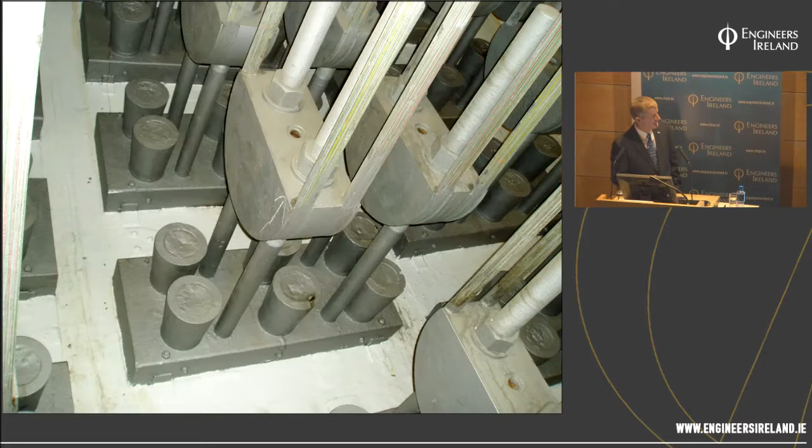So we decided, seeing as there wasn't any high-tech non-destructive testing method, and that's a picture of the strand shoe at the bottom there in the plate, and there's 6 of these here, and there's about 950 tons holding that in place, and there's about 600 or 700 tons in that strand, those 2 strands trying to pull it out.

So we decided, being engineers, best way to do it is just dig a hole and have a look. That sounds like the right idea. So we decided just to do that. Dig a hole behind the chamber on the south side, get down to the top of the tunnel, expose the strands at the top of the tunnel, open the ducts, expose the strands, and have a look.

We thought there were going to be 3 possible outcomes. 2 of them were easy from an engineering point of view, and 1 was difficult from a political point of view. The easy ones were it was so bad that the decision would be easy, or it would be so good the decision would be easy. What we thought we would find was somewhere in between, where we'd have a difficult engineering and political decision afterwards.

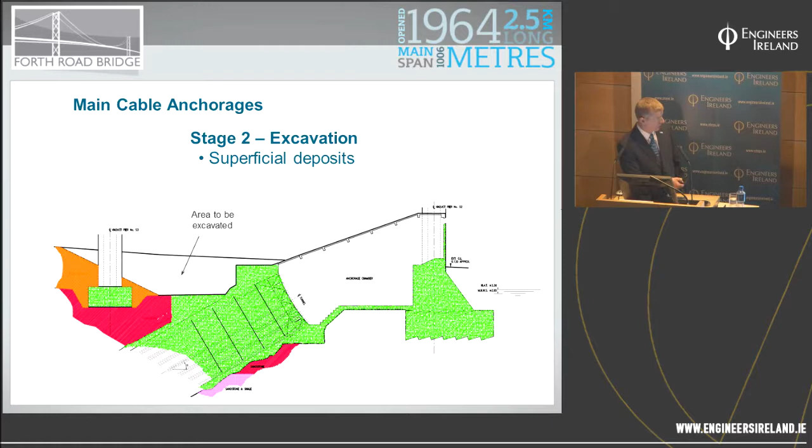We're using rock anchors and ground anchors to pin the slopes back and monitor this here to make sure it didn't move. And what we were going to do was a visual inspection, an X-ray. So the idea was to remove the grout, remove the ducts by carefully cutting them, remove the grout by careful blasting, visual inspection, and survey over a length of about 10 metres to 12 metres excavation, maybe a 10 metre, 9.5 metre opening.

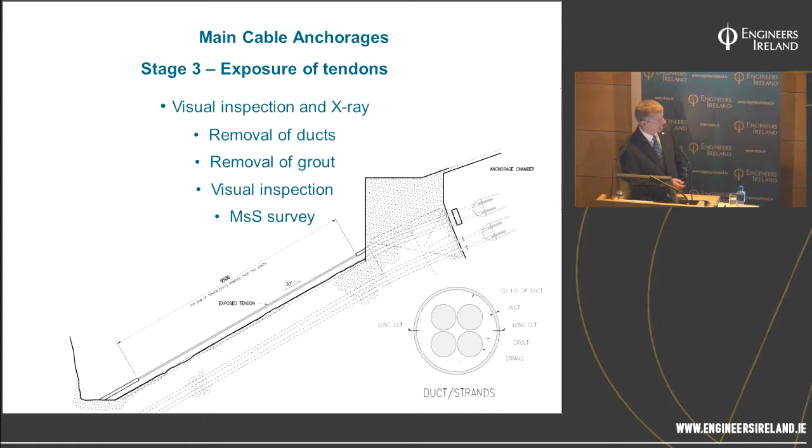And this is Graham's, who were the contractor who won the job under a quality bidding procedure - 60% quality, 40% cost. You don't want to muck about when you're dealing with the anchorages of a suspension bridge.

And this, you can see the foundation there, which turned out to be not quite in any of the as-built drawing locations. Slightly different, but we now know where it is, and we have a proper as-built. As in all things, the as-built drawings showed these to be at a certain height, and they were a metre lower, and they were supposed to be 30 degrees, and they were slightly steeper. All bad news for us, good news for Graham's, of course, but bad news for us.

And the concrete in here, this is where the winding gear was, and one of the original slides where they were spinning the cable was in here. So there was a lot more concrete than we thought there would be - good news for Graham's again, obviously. It took water jetting and concrete saw cutting to take it out in blocks. That's what the netting's for here.

And this was monitored pretty carefully to make sure it wasn't going to kick out and we'd lose the viaduct. You can see the Forth Bridge in the background here, the rail bridge. So that was, I think, a £3.5 to £4 million job, again, just to have a look. But we needed to do it.

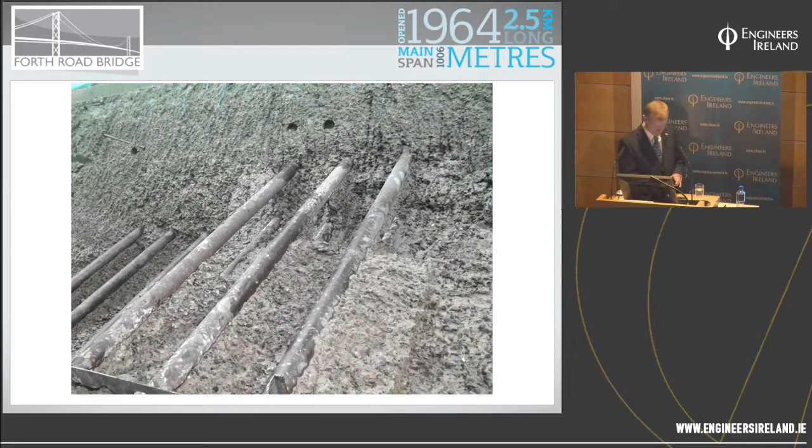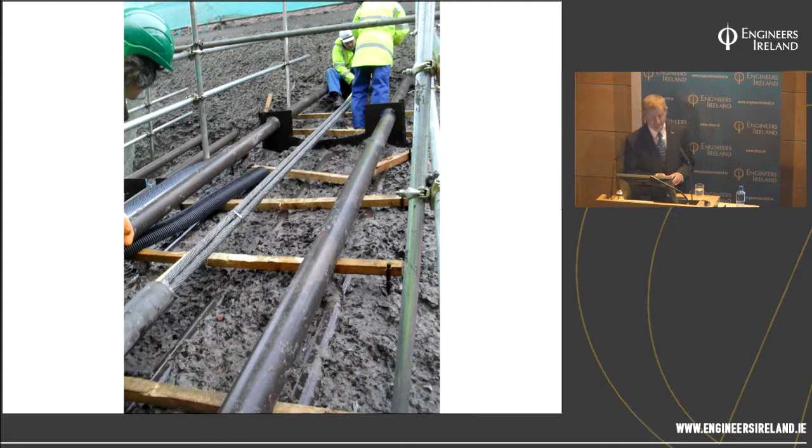And the other good news is we exposed the first strands and they looked brand new. Now, these have been buried for that long - obviously moisture hasn't got into them, because they looked in great condition. And just to be sure, we got some hardwood wedges and teased them apart slightly, and found them to be in remarkably good condition.

So going back to that, as one of the board members said to me of Forth Road Bridge, Forth Estuary Transport Authority - so you've spent £3.5 million and found out it was okay? Well, the answer was yes, and I could sleep more soundly at night knowing it was okay.

I'll just touch on what else is happening in the Forth. You may be aware there's a new bridge being built because of the issues with the cable, and on the existing crossing, the government decided to build the new replacement crossing, which is a cable-stayed bridge with 650-metre main spans. It's quite unusual, and it's a 3-tower arrangement. The problem with 3-tower cable-stayed bridges is the lack of stiffness in the system because of that central tower.

It's not anchored back to anything fixed, it's anchored back to a stayed span. So you've got to introduce stiffness into the system, and you can do it various ways. There's a bridge in Greece called the Rion-Antirion, where they've made the towers very stiff by bracing them with permanent concrete angled members at the side, and it looks pretty heavy and bulky.

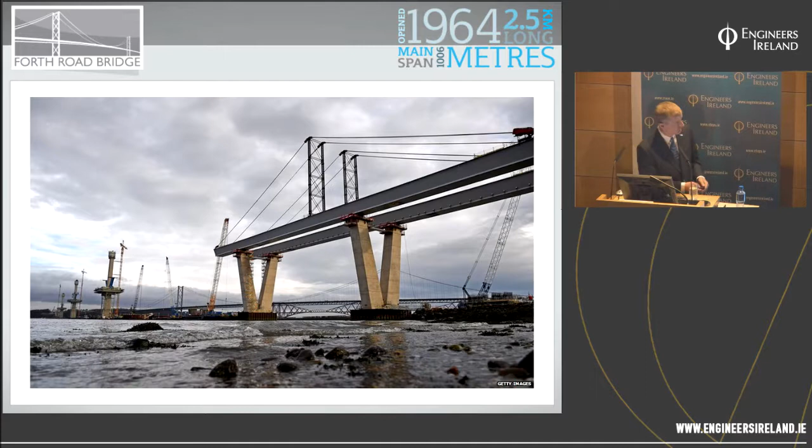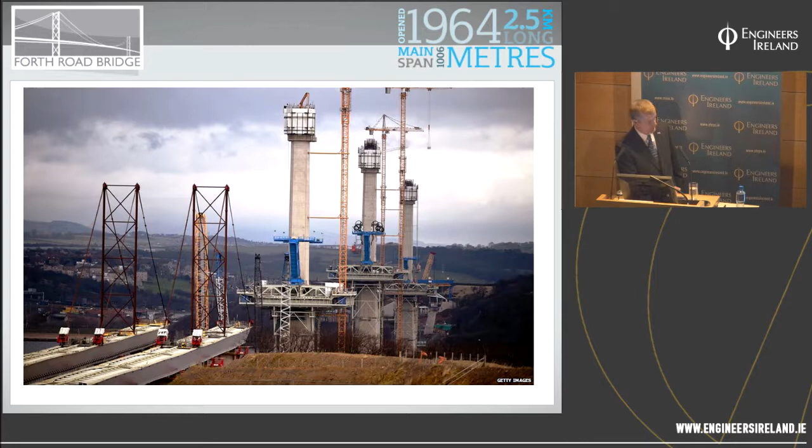These are the approach girders looking from the Edinburgh side towards Fife, and again, these are the approach girders as well. American Bridge are one of the main contractors on this job, and this is an American Bridge detail - it keeps the nose up. Instead of a launching girder, they're using these temporary towers, which are fixed back onto the viaduct, and it's quite clever. So you add bits on at the end and push it out.

These temporary stays here keep the nose up as it goes over the piers. It really is quite clever, and it engendered quite a lot of discussion locally, because before these towers were built, these were the biggest part of the bridge, the highest part of the bridge.

And of course, the comments were, they're rubbish, they don't look anything like it, the Forth Road Bridge towers are much chunkier than these. And in actual fact, now that these towers are going up, these are completely dwarfed. It's a feature of cable-stayed bridges that the towers at Forth Road Bridge are 100 metres above the deck. These will be 200 metres above, there'll be another 50 metres above the deck. So it's a feature of cable-stayed bridges that they've got to have really high towers.

As you can imagine, if you have short towers, then it's very inefficient. Stays are usually put in somewhere between 25 and 65 degrees, so you need a tall tower. The longer the span, the taller the tower has to be to hold that up. At a 650 metre span, that gives you that height of tower. It's normally 0.2 to 0.25 of the span.

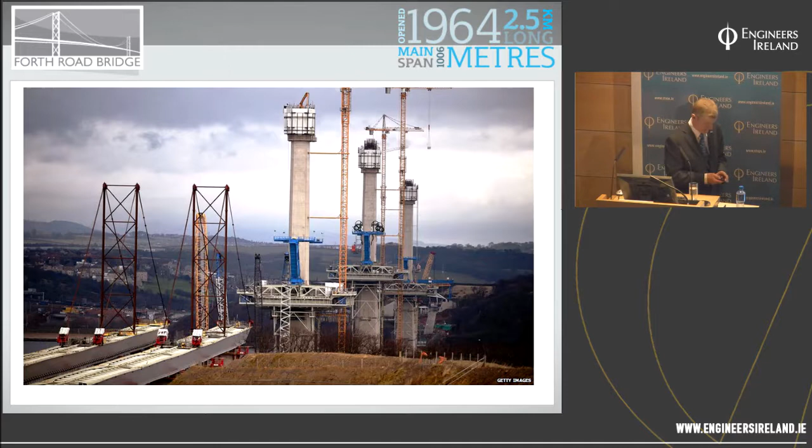And we have said we're not very good at marketing things in Scotland. In fact, we're pretty poor at it, frankly. But if we can't market this as a tourist attraction, then we might as well pack up our tents and go home. So hopefully we can attract visitors, because it will be a fantastic sight when you see these 3 bridges together in context.

We may be rubbish at rugby, but I'll fly the flag anyway.

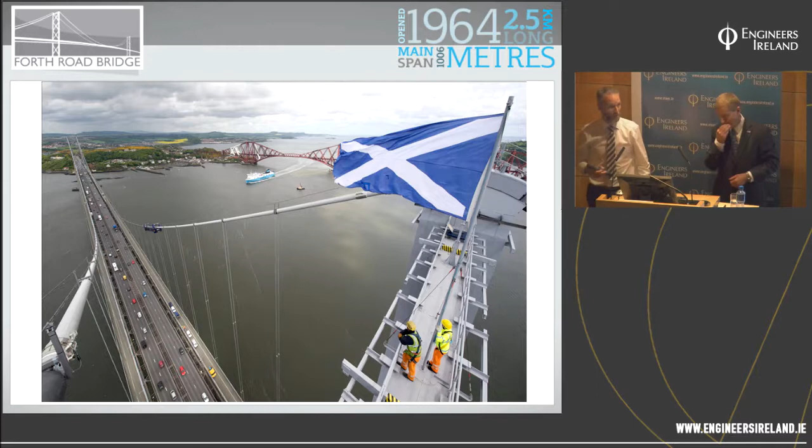I have to say, during the referendum, I couldn't show that photograph. Any questions?

I suppose a fairly simple one. If you were the designer of the bridge, what element would you change to make it that bit easier to maintain? I think I'll do the political thing and not answer your question directly, and tell you something else.

But it's really important that people who have got experience in maintaining these bridges get involved in the design process, and it's not happening. It's not happening as far as you can see anywhere, and it's a pity, because it's all about access.

We have made great strides in the UK. The Highways Agency issue their BDs to talk about integral bridges and this and that, but the bottom line is the guys designing in a design and build contract, who are engineers designing for the contractor, have got one thing in mind, and it's to win the bid. And that's right, because if they don't win the bid, that's it. That's their focus, and rightly it should be.

It should be at the procurement side of things that the government or the agency procuring the bridge should make sure that experience is there, because it's all about access. It is all about access and containment. And I think we continually underestimate how to get to places.